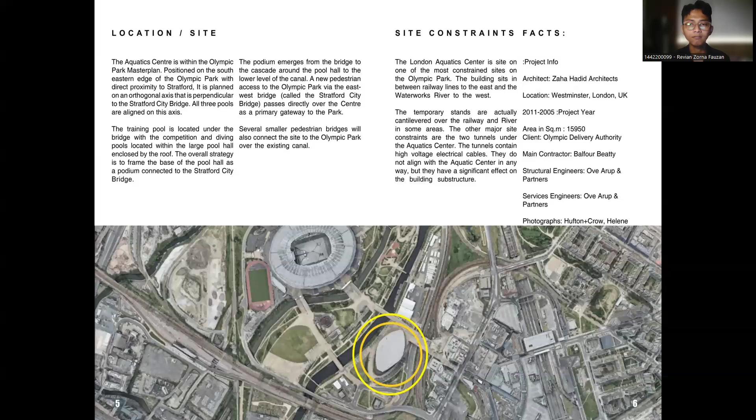Concept and approach. The London Aquatic Center may appear complex and confusing, but at its core it is a simple concept brought to fruition through clear architectural moves.

Zaha Hadid decided to respond to the fluid movement of water, which heavily influenced the form of the roof. Through tons of forms, the roof took on an undulating wave-like structure. This concept continued to drive design decisions throughout the design process. The roof structure, daylighting, ventilation, and construction process all became supports for the overbearing concept of the roof.

The existing site also influenced and drove design decisions. During the construction process, many needs had to be met to counteract the soil content and possible flooding from the nearby river, and the existing electric and pipelines.

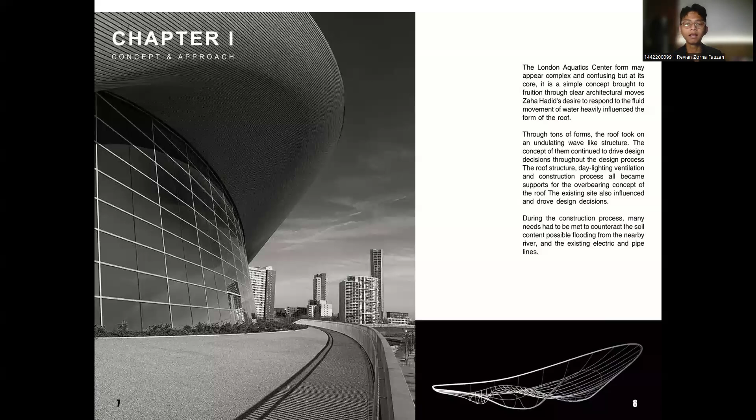The constant working relationship with the site creates a clear image of why Zaha chose to emphasize the connection to the existing bridge, raising the pool hall on the podium and connecting the building to the public circulation.

Entering and exiting the site, the flat podium appears to only support the roof, but underneath is program-filled space dedicated to public and private space. The curved form of the roof steals the eye of any pedestrian approaching the building. The flat podium, contrasting with the roof form, not only supports the pool hall structurally but also pragmatically.

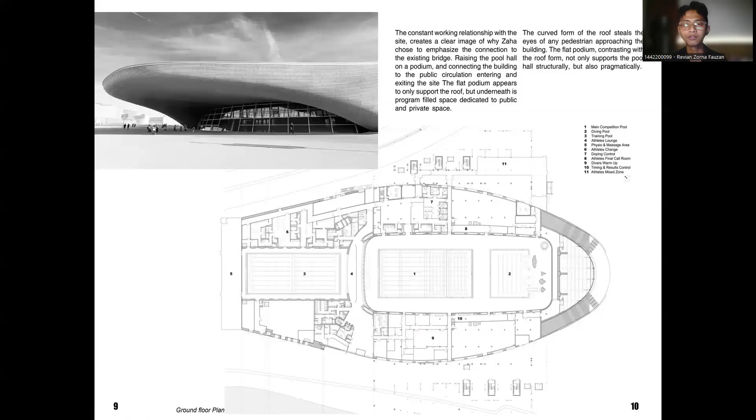The 15,000 seats along the east and west sides of the building were built almost entirely of recyclable material, knowing that they would only be used for the Olympic and Paralympic Games. These seats were not forgotten in the design of the center structure, however.

One, the seating structure wrapped around the roof of the aquatic center, creating a tighter air barrier. Two, fabric was fit along the ceiling timber so as to not damage the material. This also kept movement of the stands to a minimum. Three, the stands were built following the curvature of the roof. The design of the joint between the structures limited the disconnect between the two and created an almost seamless relation.

The stadium was designed in such a way that it could be used during the Olympics as a stadium, and after that as a legacy. The Olympic mode refers to the style of the building during the 2012 London Olympics, with the two wings of seating along the edge.

A large design aspect of the London Aquatic Centre was what to do with the building once the Olympics ended. London wanted to keep the structure and use it as a community center, which the city was lacking. Zaha and her architects' solution was to have 15,000 temporary seats that would attach to the roof.

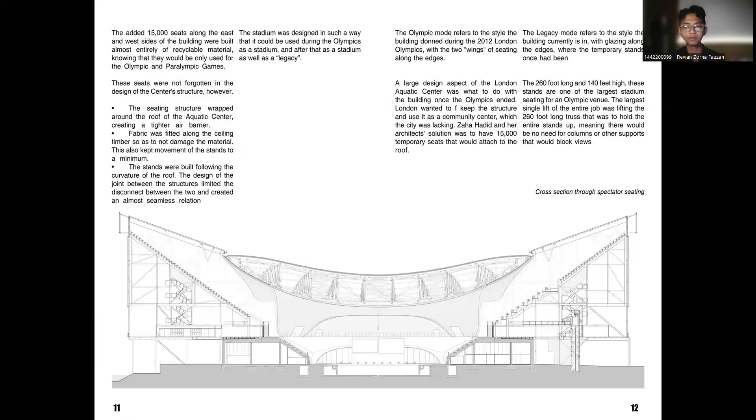Structural Design, Chapter 2: Construction Process. Construction on the London Aquatic Centre officially began in June of 2009. The building was complete in Olympic mode in 2011, with spectator seating for upward of 15,000 people.

After the Olympic Games in 2012, the deconstruction of the additional spectator seating began. The building was converted to its legacy mode with a capacity of 2,500 in 2013. The construction process was an arduous task, with precision and accuracy being key to each stage of construction.

The complex form of the building required specialist construction, from the careful structural planning in the roof to the technical planning in the Olympic pools. The construction had to be carefully orchestrated in order to meet the schedule and be finished for the Olympics, as well as its outcome and complexity of structure. The attention to detail in every aspect of this building makes it an architectural phenomenon.

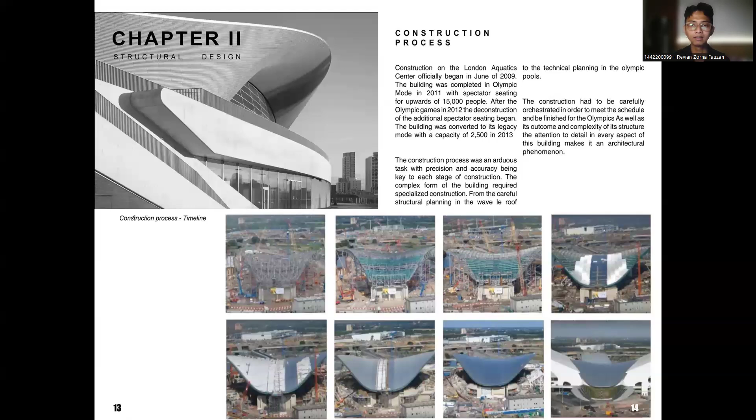Foundation construction began after the remediation process was complete and the electrical tunnels were complete. The method of using cast-in-place piles as a foundation type was chosen because it helped to stabilize the soil after the remediation. Construction on the supports for the roof structure began at the same time.

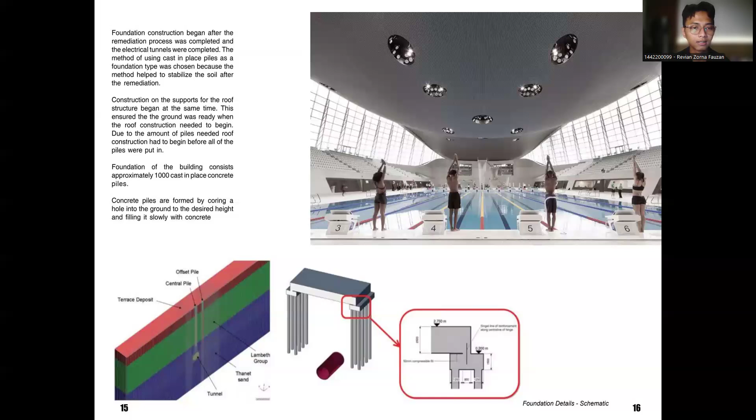This ensured the ground was ready when the roof construction needed to begin. Due to the amount of piles needed, roof construction had to begin before all of the piles were put in. The foundation of the building consists of approximately 1,000 cast-in-place concrete piles. Concrete piles are formed by coring a hole into the ground to the desired depth and filling it slowly with concrete.

Connecting the bracing for the roof creates a grid across the roof. Precision and planning were key. The roof was constructed in stages. First, supports were built at the end point of where a beam would land. Then cranes lifted the prefabricated beams up to their attachment point and the beam was attached.

After all the beams for that section were attached, struts were added for support while building, extra ties were added between the concrete roof supports during construction. Foundation plates had to be put on the supports of the cranes to ensure that they wouldn't sink into the ground with each beam lift. The roof structure was fully built before work on the interior space could begin, due to the supports needed for construction.

After the roof structure was built, the pool construction began. There are several layers created in the top of the roof. Sheeting and waterproofing were put down over the steel supports. The mechanical system was placed into the space, and spacers were added before the final aluminum sheeting was added.

The process of rolling out the sheeting for the roof only took a team of 25. It took only a month to cover the roof fully with the final aluminum finish.

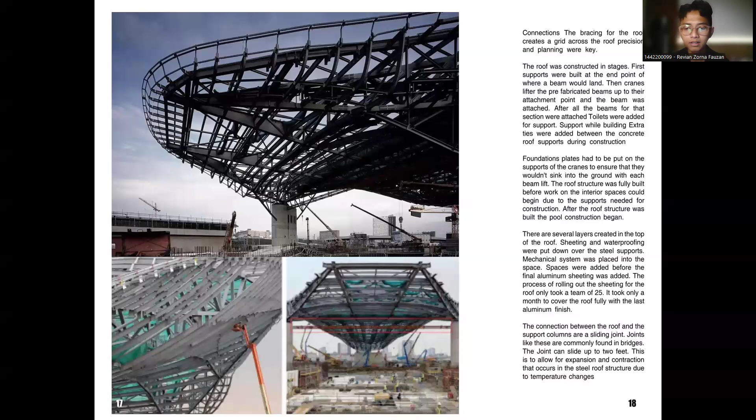The connection between the roof and the support column is a sliding joint. Joints like this are commonly found in bridges. The joint can slide up to 2 feet. This is to allow for the expansion and contraction that occurs in the steel roof structure due to temperature change.

Structural system: one of the key challenges of the project was developing the structure for the spectacular waveform roof, which is supported on only two concrete cores to the north and along a 70 foot length of wall to the south. The architect's roof geometry was inspired by the fluid geometry of water in motion, with the lower surface lying between the diving and competition pools to help describe two different zones within one building volume. The two sides of the roof sweep upwards, emphasizing the waveform and also allowing the pool hall in legacy mode to be flooded with natural light.

The key driver to the arcing form of the two sides, however, was the need to provide column-free sight lines to all 17,500 spectators, down to the far side lane of the competition pool, in games mode.

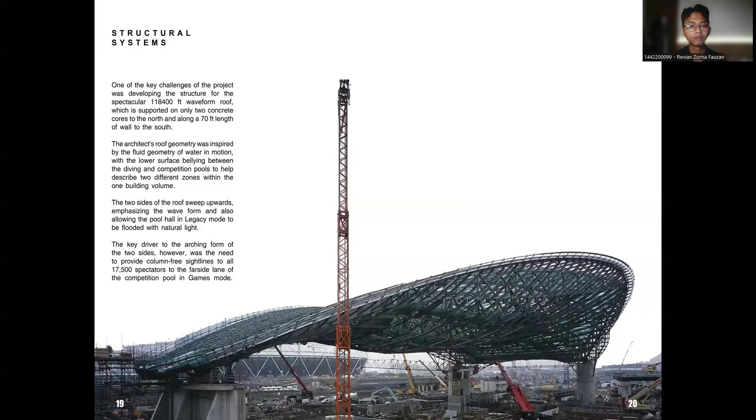Steel system: the structural system consists of one diaphragm with three total connections. The overall plan form of the roof consists of a rounded diamond shape, being much wider at midspan.

The primary structure was fabricated entirely of straight H-sections fabricated from plate, with flanges oriented vertically and equal width sections for chords and braces to facilitate ease of fabrication at joints. Plate girders were used on some trusses, narrowing to acute angles at their ends. The gross curvature of the primary structure was formed by faceting the truss chords at node positions.

The roof contained about 3,200 tons of structural steel, of which 2,000 tons are fabricated plate girders, with the structural connections totaling around 600 tons.

How the roof structure works. The whole roof structure is supported on just 3 points: a wall at the south and two concrete cores to the north. Despite its complex shape, the roof is made up from relatively simple two-dimensional elements.

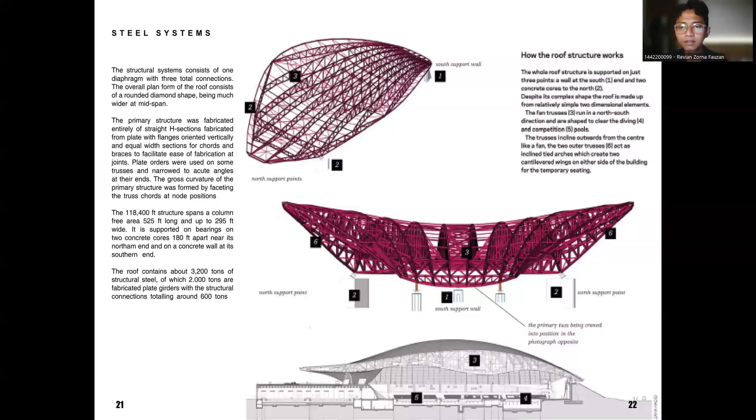The trusses run in a north-south direction, shaped to clear the diving and competition pools. The trusses fan outward from the center. The two outer trusses act as inclined tied arches, creating two cantilever wings on either side of the building for the temporary seating.

The roof structure comprises a series of long span trusses spanning the length of the main pool hall, from the transverse truss mounted on the southern retaining wall bearing to another transverse truss spanning between the northern concrete cores. The center fan truss carries load in truss action spanning between the north and south transverse truss, which carries the load down to supporting bearings on the concrete structure below.

Due to the roof geometry, arches are formed in the wing areas to the west and east of the central area. Under uniform loading in the central fan, the two opposite inclined trusses, structured as arches in the wing area, allow the roof to balance each other, forming two dome-like forms with a compression hoop structure at the angle around the roof perimeter.

Tension forces arise from the change in geometry; 34 degrees is the angle that separates compression and tensile force. At the London Aquatic Center, the angle in plane at the kinks which occur at the wingtips is resisted by tension, as the roof angle is 30 degrees, creating a compression hoop instead of a tension tie across the central ring. If the angle is greater than 34 degrees, this results in a tension force instead.

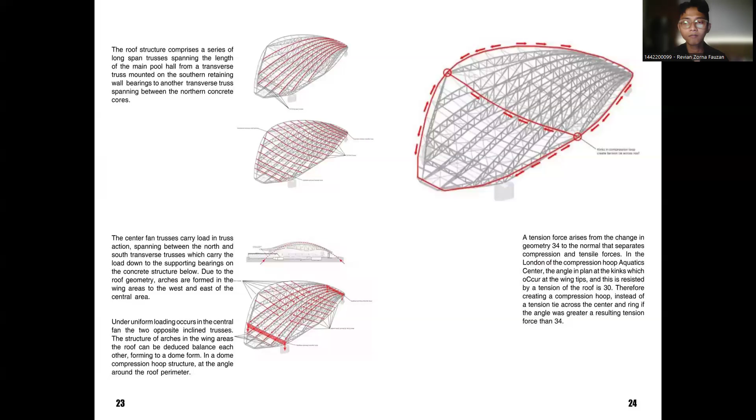In order to ensure the roof performs as described above and to minimize the effect on the substructure, the northern end of the roof is supported on fixed spherical bearings acting as true pins. The southern end is supported on three sliding spherical bearings along the top of the southern wall: two with bearings sliding in both principal axes, and the central bearing only allowed to slide along the central axis of the building. This was done to avoid the support wall attracting thrust, to simplify the substructure construction, and to permit the roof to expand under temperature effects.

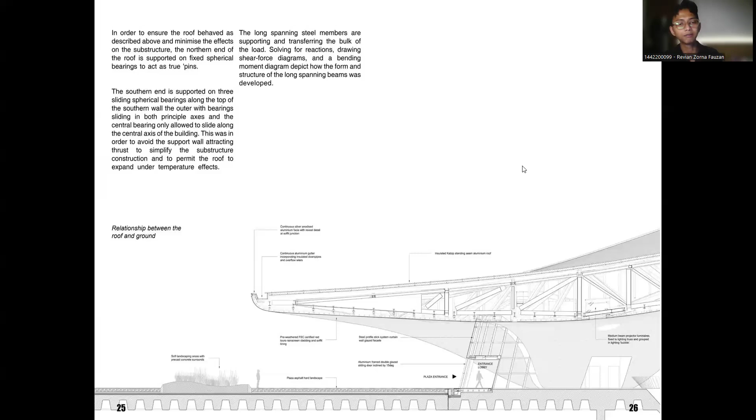The long spanning steel members support and transfer the bulk of the load. Solving for reactions, drawing shear force diagrams and bending moment diagrams depict how the form and structure of the long spanning beams was developed. There are some details of the picture. Podium and roof details.

Now, the concrete system. The plaza bridge structure is designed as a three-span continuous portalized frame, approximately 260 feet long and 165 feet wide in plan, with a central span of 100 feet crossing the 165 feet training pool. The remaining buildings, separated from the bridge structure, include the 165 feet training pool tank and adjoining elements, which are constructed within the bridge supports but not attached, allowing the building to be built without affecting the bridge performance in any way.

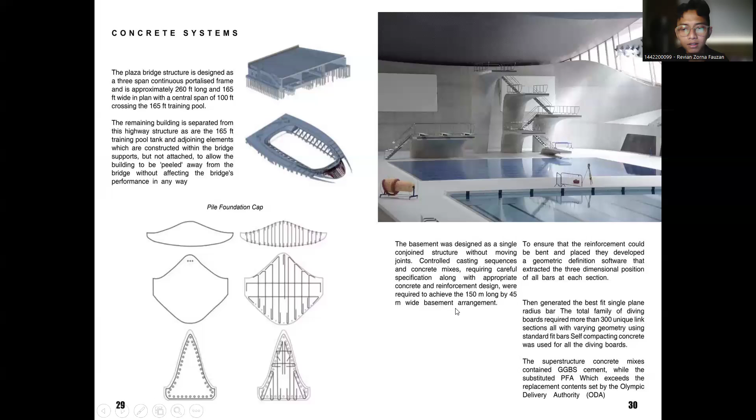The basement was designed as a single conjoined structure without moving joints, requiring carefully controlled casting sequence, concrete mixes, and reinforcement design to achieve the 150-meter long by 45-meter wide basement arrangement.

Materials used: the high humidity in the pool hall called for materials that will not warp or swell, which means any wood used will have to come from a humid climate, and any other material cannot be extremely porous. Four major materials were used in and around the building: concrete, glass, wood, and tile were the most logical choice.

Concrete is noticeable throughout the entire complex. The main podium, which the building sits on, is a large span of continuous pour concrete. The bridge of the London Aquatic Center, utilized as its main entrance, is also completely concrete. Along with this, the three main legs the roof sits on are concrete shear walls. The contractor chose to use ground granulated blast furnace slag cement, a byproduct from the steel industry that contributes to lower embodied carbon concrete.

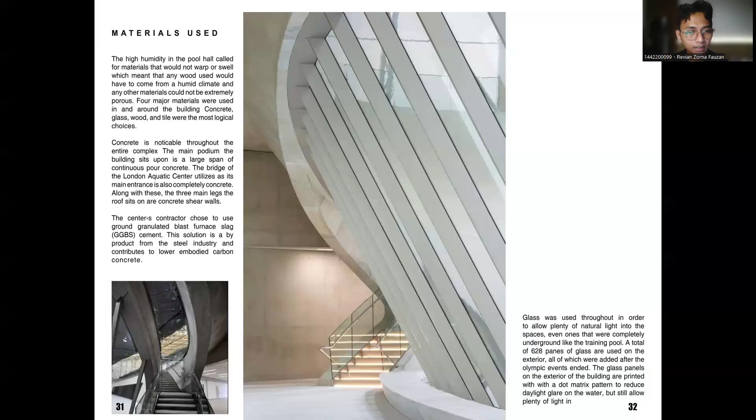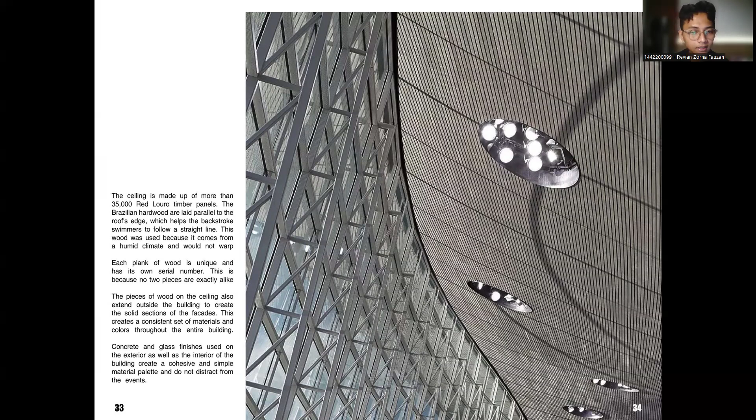The ceiling is made up of more than 35,000 red louro timber panels. This Brazilian hardwood is laid parallel to the roof edge, which helps backstroke swimmers follow a straight line. This wood was used because it comes from a humid climate and will not warp. Each plank of wood is unique and has its own serial number, since no two pieces are exactly alike. The wood on the ceiling also extends outside the building to create the solid section of the facade, creating a consistent set of materials and color throughout the entire building.

Conclusion. Overall, the structure is sensual in its form with a generosity of space. It is considered one of the most iconic buildings in recent times due to its pure and powerful form.

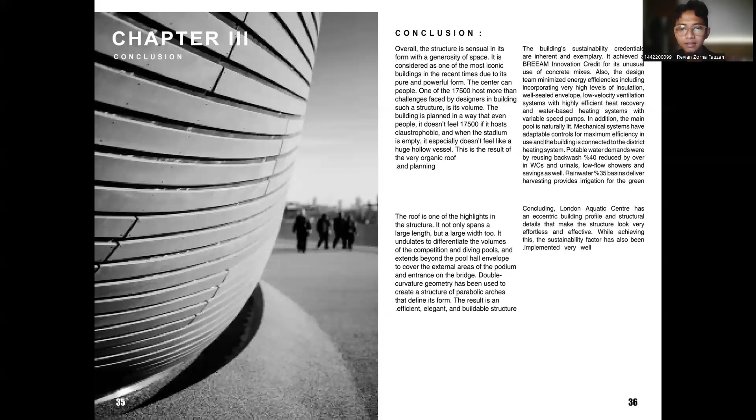The center can seat up to 17,500 people. One of the biggest challenges faced by designers in building such a structure is its volume. The building is planned in a way that even with 17,500 people it doesn't feel claustrophobic, and when the stadium is empty, it especially doesn't feel like a huge hollow vessel. This is the result of the very organic roof and planning.